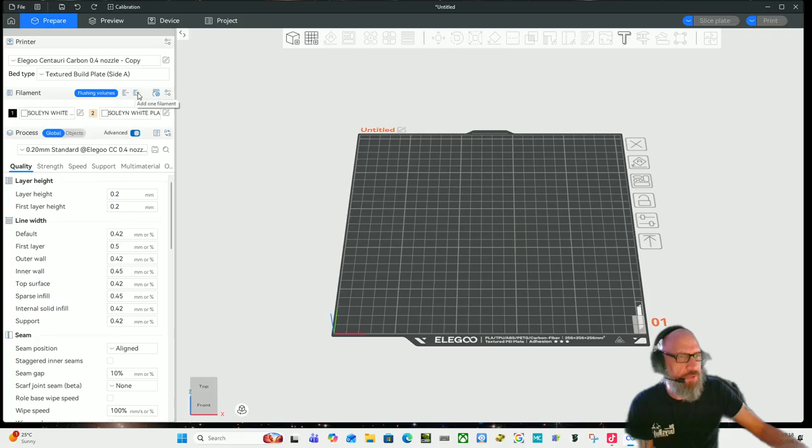So if you try and have two different colours, you can do that just by using the add filament, and adding a filament will add extra colours. You could take away the filament, so your filament might just be showing one. If you want to add an extra colour, you can add some extra colours just at the top here. But ideally we just want to have two colours. If you are there or thereabouts with that, either give me a thumbs up or a yes and I'll carry on.

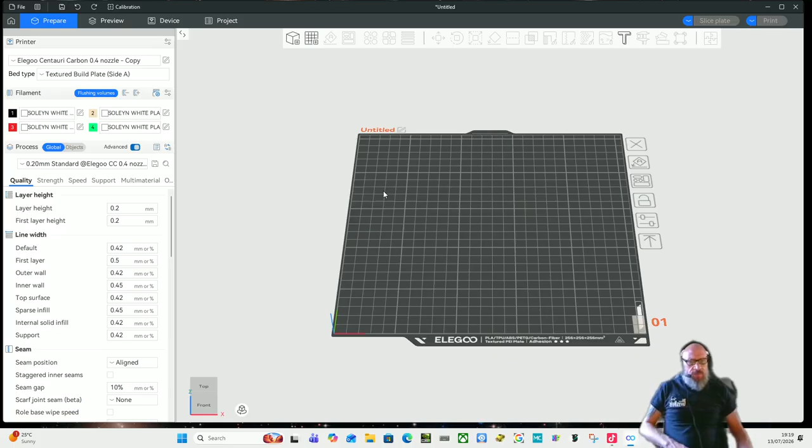Everything else we're going to do now is going to be done in the slicer, no need to go out to any other CAD software. There are things you can do in CAD which could help this along, but for today's tutorial, it's just in the slicer.

All we're going to do is right click anywhere on your plate, and it should bring up a menu. On Elegoo Slicer it says add primitive. In Bambu Slicer it may say add part. In Orca Slicer, I'm not quite sure which one it says, but it'll either say add part or add primitive.

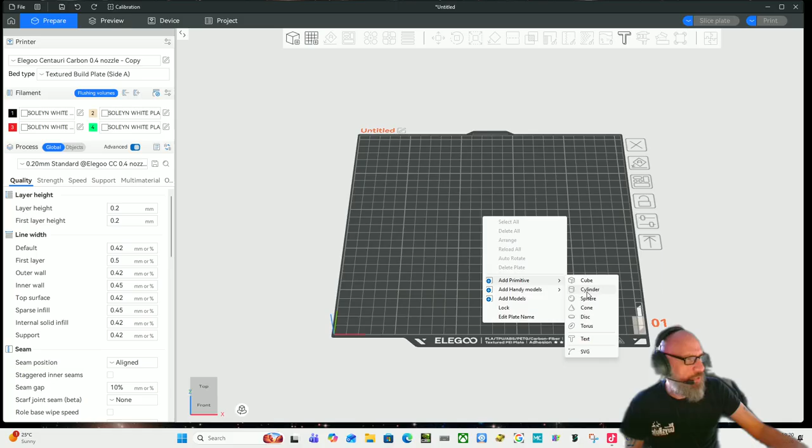What we're going to look to do first is create our clock face for this example. So we're going to go to add primitive, and we're just going to add a cylinder. You'll see cylinder is the second one down on mine, and we click on cylinder, and that should give you a generic cylinder in the middle of your plate.

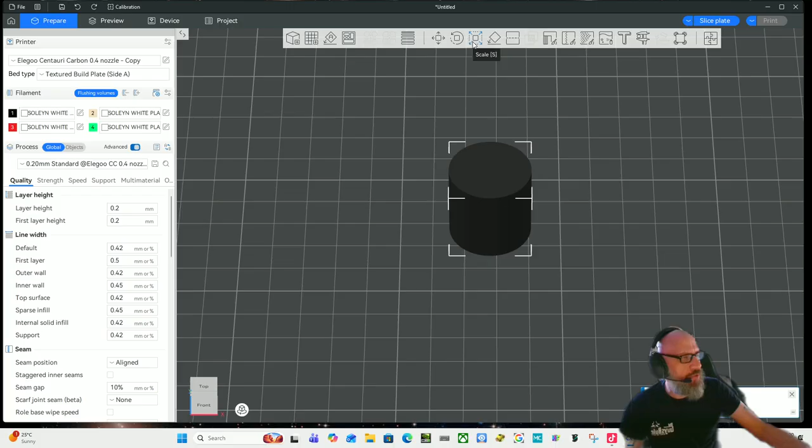You've got your little highlight cube around it, so you can see it's been selected. Next, up the top here, you can see menus along the top, and all we're looking for is this scale one — this one that says scale. It's got a little square and then 4 arrows coming out of it, and we click on scale.

This, believe it or not, is a part where a lot of people get caught out. Honestly, they do, because I've done this a few times with people over WhatsApp video, a few one-on-one tutorials. So what we're looking to do now is change the size of this cylinder.

Now we want to make sure that we don't touch this top line. This top line at the top is just for scale, so don't touch anything on the percentage line. All we want to do is work on the bottom 3 boxes. First thing we're going to do is turn off uniform scale.

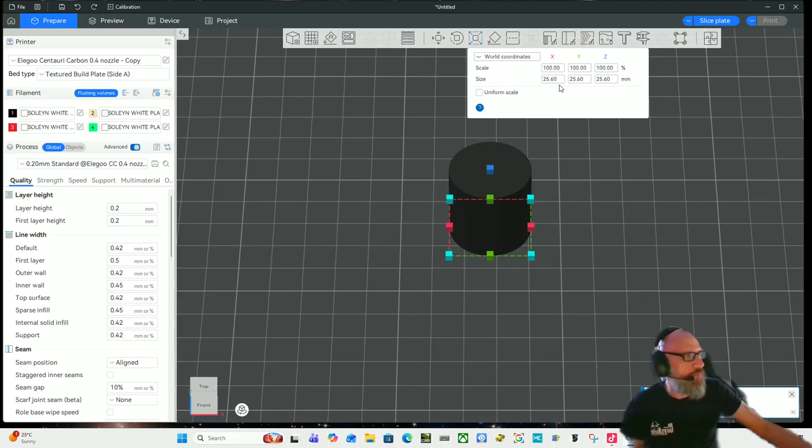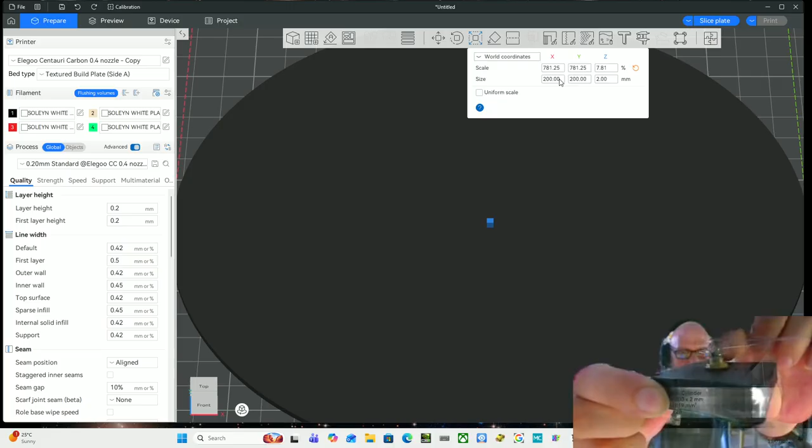Now in X we want our clock face, in this example, to be 200 diameter wide, and we want it to be 200 in the Y, the depth, and we can hit tab on that, and we're going to do the Z, which is the thickness of your disc, going to be 2 mil. I find 2 mil works really well for me for the clock mechanisms that I have — I don't know whether it'll show up, but these little clock mechanisms, 2 mil works just great for the space I need. So I'm going to stick with 2 mil.

So once we've put our 200 in the X, 200 in the Y, 2 mil in the Z, making sure the uniform scale is off, and also making sure you hit enter in between each one of these, we can click off, and you should have your clock face.

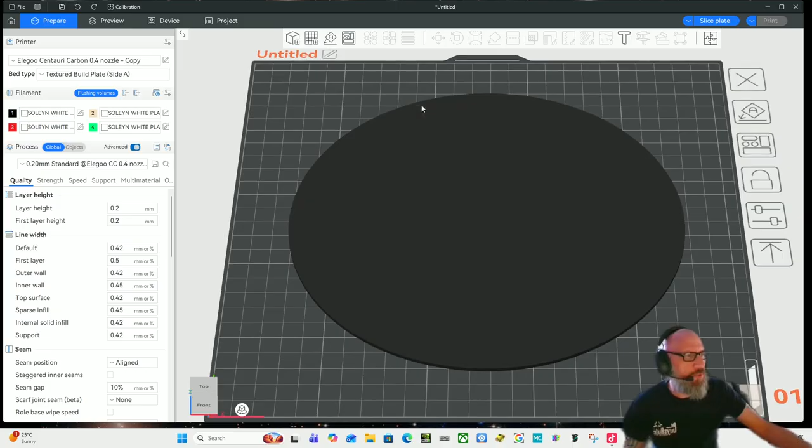A couple of things I like to do: I always work on plate 1, so I've got no other plates, just the one plate. And as I go along, I like to try and center my pieces, making sure that they're on the center.

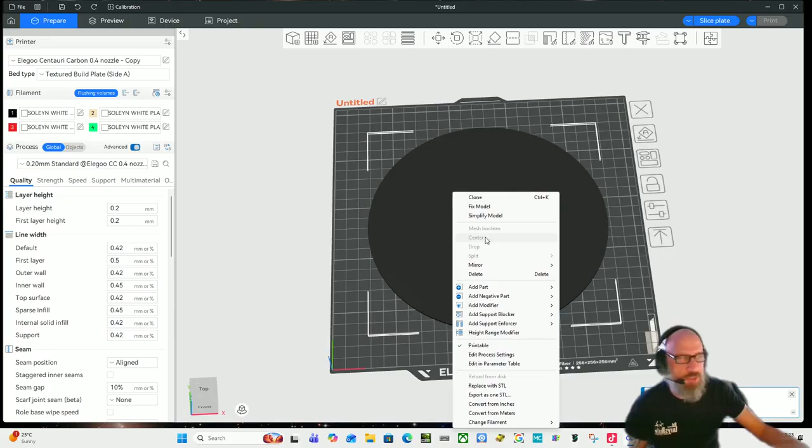So if I just click on my disc and then right click, if it wasn't in the center, I could recenter it using the center button. For example, if I'd moved this over here for whatever reason, I can just left click on the disc, press the right mouse button, and center it — that's going to center that back in the center of this disc. That will become important when we come to put our SVG on later on, or our clock face.

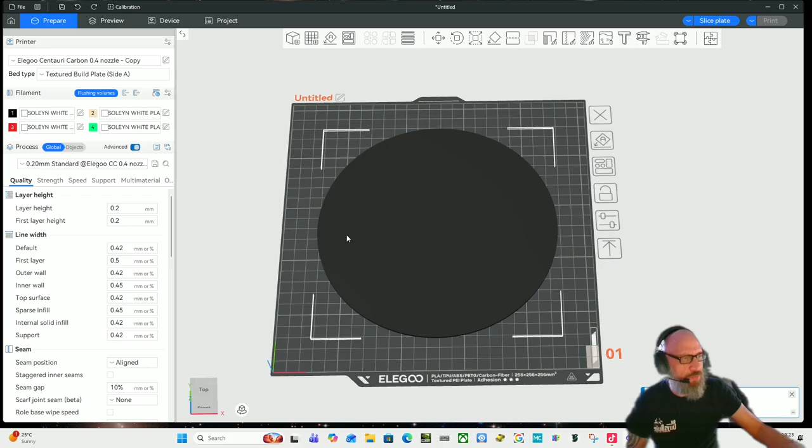I'll add this because I've done quite a few of these. I know that when I'm working on plate 1, the center point of plate 1 is 128 mil. So when I go to my placement, move, you'll see that I've got 128, 128 - that's the center point. I remember that from doing this before.

Okay, brilliant. Now what we're going to do is click on our disc, then right click, and go to add a part. So now we're not adding a primitive, we're adding a part, and it'll bring up a new list where we could add a cube, a cylinder, or a sphere.

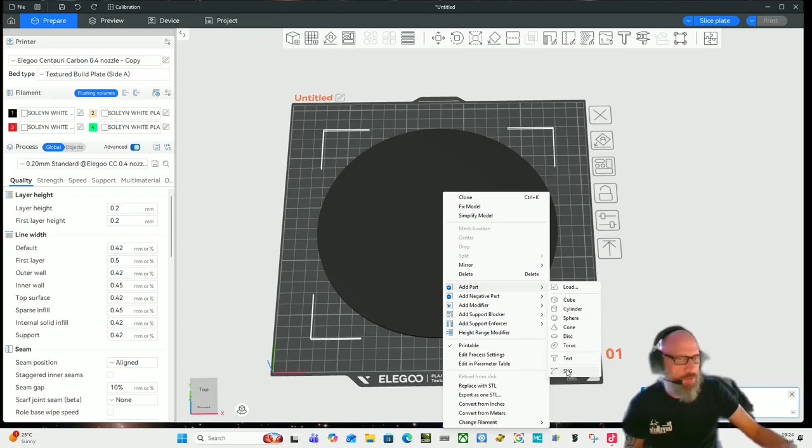Right down the bottom we've got an SVG, so we're going to click on SVG, and it's going to take you to your documents. I downloaded this one to my downloads earlier, which was this V5zbd01 - that's the one I got converted through the converter. I'm just going to double click that one.

And now you should have your SVG appear in your slicer. Don't worry about the size of it for the moment, we'll sort that out in a minute.

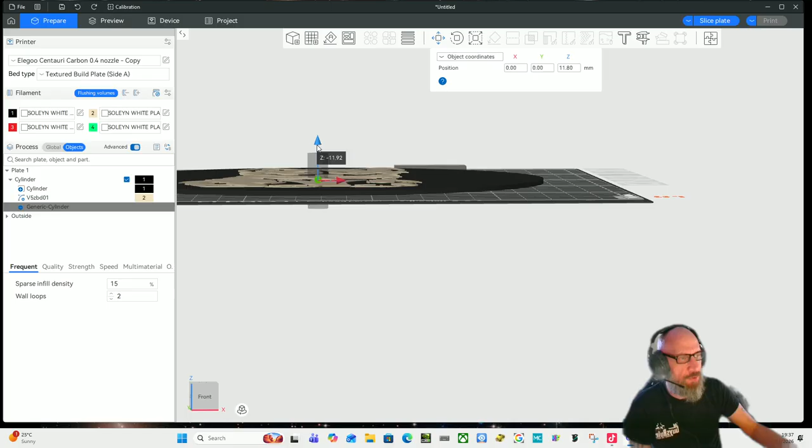Now we can move it, and this is why I leave it oversized - all I want to do is make sure that I can see it sticking through the top and the bottom. Doesn't matter how much it sticks through the top, doesn't matter how much it sticks through the bottom, as long as it sticks through.

Am I still getting volume at the minute? Am I still being heard? Yeah, okay, cool.

So now what we can do, we're going to give that another quick slice. All we're looking to do is make sure that we can see that our negative is now in the centre of the clock face.

I don't have a multicolour machine, so the way that I would do this is I'll just do a manual change. So I would turn off this multicolour material part, because it doesn't affect me.

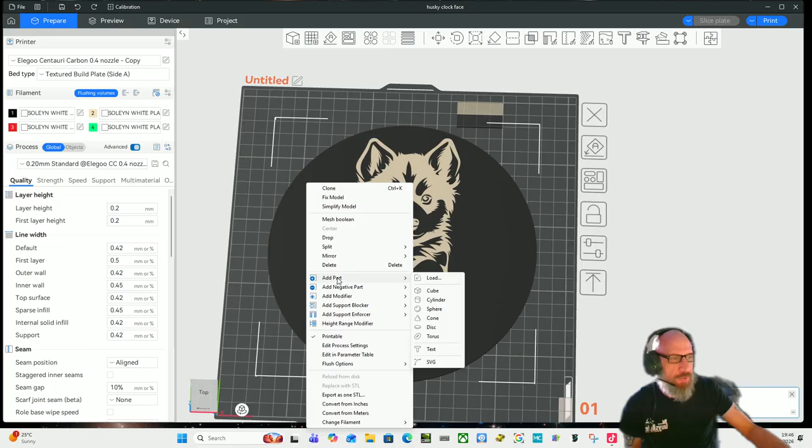So all I'm going to do is first and foremost make sure that I'm in prepare, come up to this top tab. If you've sliced it before, make sure you're in this prepare tab. And then we can select our disk, so just left click on the disk, press right click, and we can go to add part, come across, and we're going to go to SVG.

And now I can choose my SVG. I've created the top one as the numbers, and the second one down is the Roman numerals. So let's add the Roman numerals in.

As before, the Roman numerals come in. First thing I'm going to do is ignore everything on this side. Then I'll come to Objects and go into the Objects tab. You'll see that on the plate at the moment I have a cylinder, which is my black cylinder, and clock face.

I have an SVG called V5, which is my Husky. I then have an SVG called JaVEC01, which is my Roman numerals, and that's the one I'm going to change the filament to a different colour just so I can see what I'm doing with it. The bottom one is my negative generic cylinder, which is my centre hole.

Now before I click off anything else, I'm going to come back over to this right hand side. It defaults in at 10mm, so I'll change that to 1mm for the sake of argument again. I'm not going to use the surface, it's on join, and I can click anywhere off that.

Now obviously this one now isn't in the centre. So what I'm going to do is just eyeball it for now, just for now.

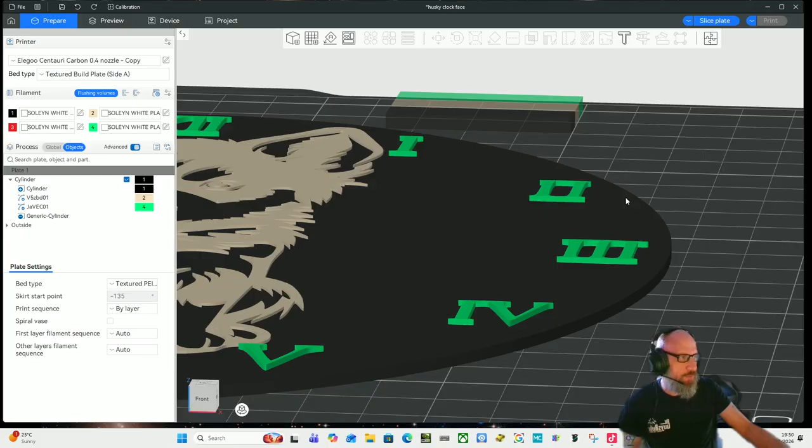And now you should see on there, if I just try and zoom in, that our numbers are now set. Because we've added the numbers to this part, it will automatically snap to that surface, and you can see that your numbers are now part of that.

Let's just do a quick slice to make sure that is working. Okay, so now that's a 1 hour and 42 minute print, and that's going to print a 2mm black disc. It's going to print 1mm for the image of the husky, and it's got 1mm for the Roman numerals. Now what you might want to do at this point is shrink this little husky down a little bit, just so it's not overlapping these numbers.

So in order to do that, just remember, we've just sliced it, so the first thing we need to do is come back out and go into Prepare.

So we're back in our Prepare tab. We want to resize the husky, so don't click the husky on here, come across to your objects and select your husky. You know it's your husky because it is in cream. We're going to come up to scale, and as long as we grab it by one of these corners, we can reduce that little husky down just a little bit.

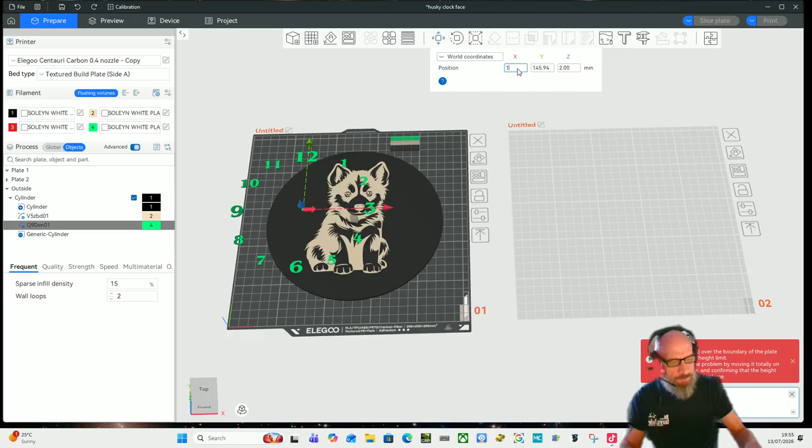So just gone through the normal routine, brought in my numbers as an SVG, changed the colour so I can see them, changed my depth to 1 mil, and then I can come back to my numbers. I'm going to move these numbers, change my object coordinates to world coordinates. I know what my numbers are, which are 128 for my X and my Y, leave my Z, press enter on that.

While I'm still in here, I can then resize, just grab these corners, and I can bring - oh no, that's done the whole thing, let me go back, and again, that's because I pressed the wrong one. Choose my numbers from the objects, do apologise, and we'll resize that, and we can resize our numbers from there.

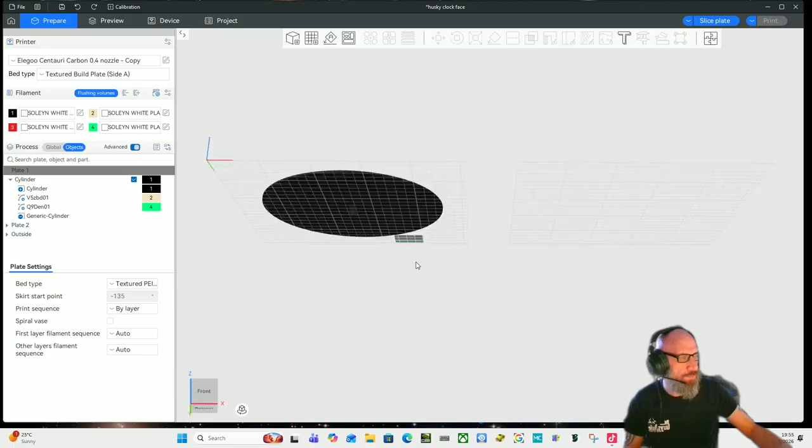Let's try that. So look how that looks on the top. And so we can also very quickly

change that SVG to a different SVG. And what you can do, and something that I do quite often, is I'll find some numbers, like that I've got the 12 or the Roman numerals, and you'll just save them into the folder as clock face numbers SVGs, and then you just bring them in as you see fit.

Exactly the same with this little dog, wolf, husky, whatever you call it - it's just as easy. I could go into there, add an SVG, add a part. I've got plenty of SVGs that I have done. I always forget to number them now, but this SVG, you'll probably recognise - that's an SVG that's been created in exactly the same way as my husky.

And there we go, that is how easy it can be.

Now, there is obviously more that you can do. First and foremost, I'm not going to do the hands because quite often you'll buy these little clock mechanisms and they'll have hands on them, or you can buy a pack of 12 clock faces and they come with an assortment of hands. Yes, you can print your own hands off, but it's a bit more difficult to do just in Slicer. If you're going to buy a clock mechanism, the chances are you're going to have a set of hands with them anyway - they're only lightweight aluminium, really lightweight, so sometimes it's not worth 3D printing the hands. Although I've got my clock in front of me, my dad's one that I designed the hands for in Fusion. That's something you can do, but again, you just need to make sure you make the holes the right size for your clock mechanisms.